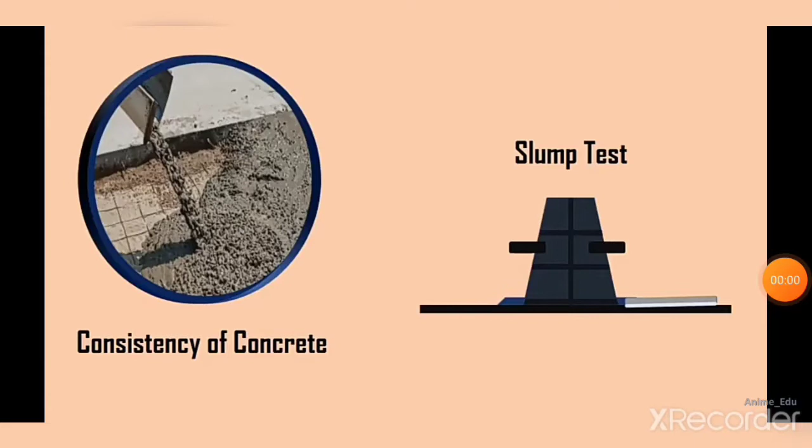...concrete work where the nominal maximum size of the aggregate does not exceed 38 millimeters. This method can be employed either in the laboratory or at the site.

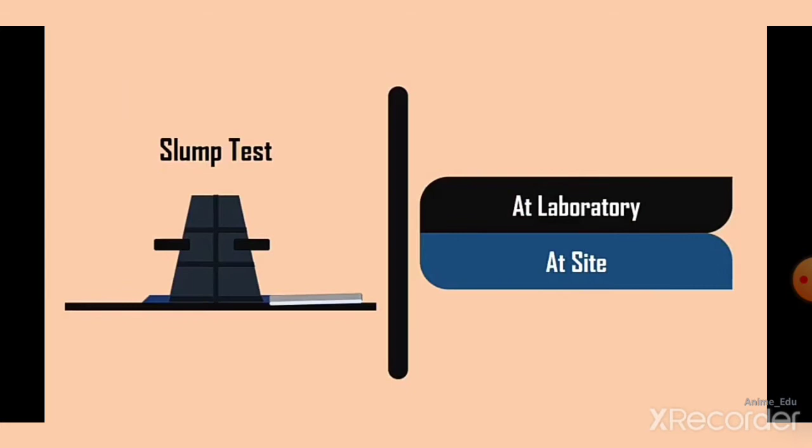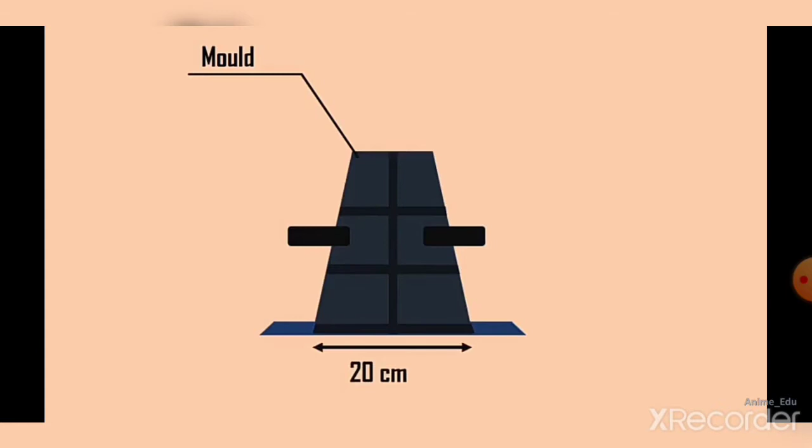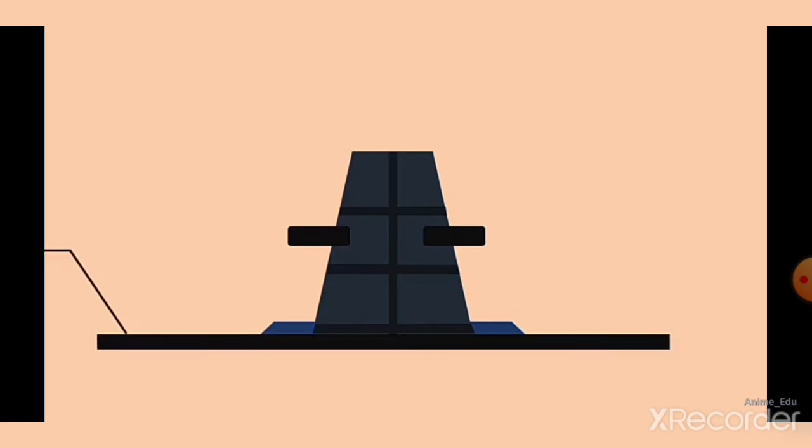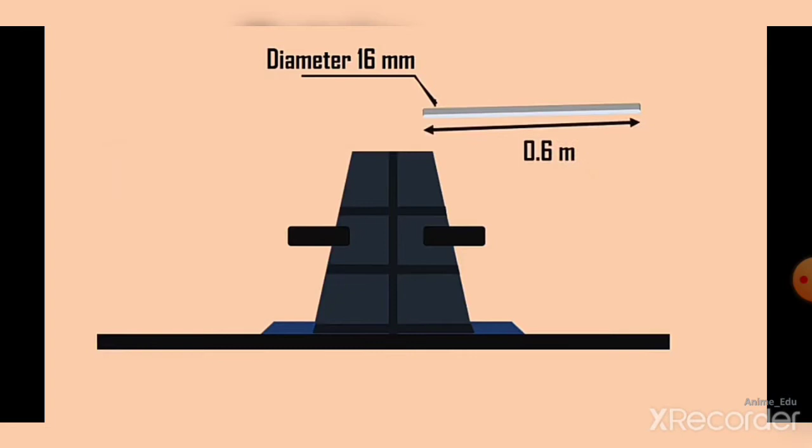Apparatus required for slump test. The mold for the test specimen is in the form of the frustum of a cone having the bottom diameter of 20 centimeters, top diameter 10 centimeters, and height of the cone is 30 centimeters. A metal plate of thickness 1.6 millimeters is used as a base. A tamping rod of 16 millimeters diameter and 0.6 meters long is used.

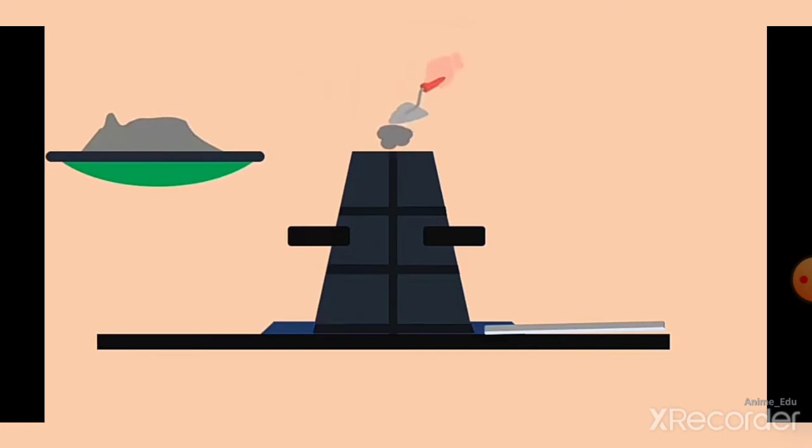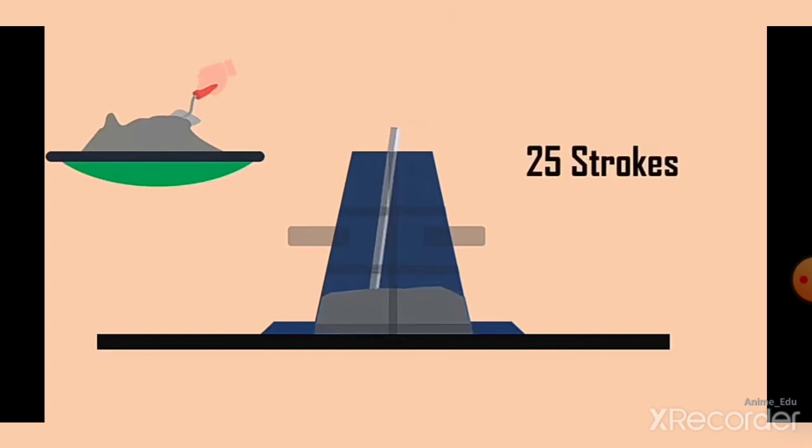Let us now see the step-by-step procedure for concrete slump test. The internal surface of the mold should be thoroughly cleaned and freed from moisture and any set concrete before commencing the test. The mold is placed on the smooth metal plate. The mold is filled in 4 layers, each approximately 1/4 of the height of the mold. Each layer should be tamped with 25 strokes with tamping rod, such that the strokes are distributed over the cross-section.

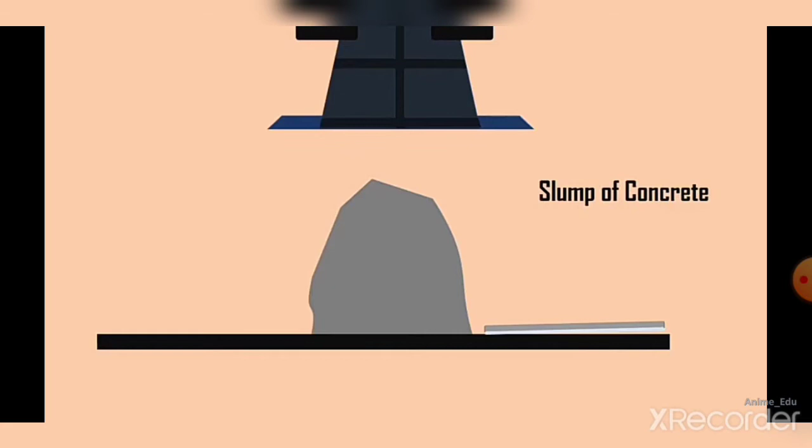After the top layer is filled, the concrete is struck off level. The mold should be removed from the concrete by slowly raising in a vertical direction. Now, you will notice concrete tends to subside. This subsidence is referred as slump of concrete. This slump value is then measured by the difference of the height of the mold and that of the highest point of the specimen. This difference in height is taken as slump of concrete. The pattern of a slump is displayed on the screen.

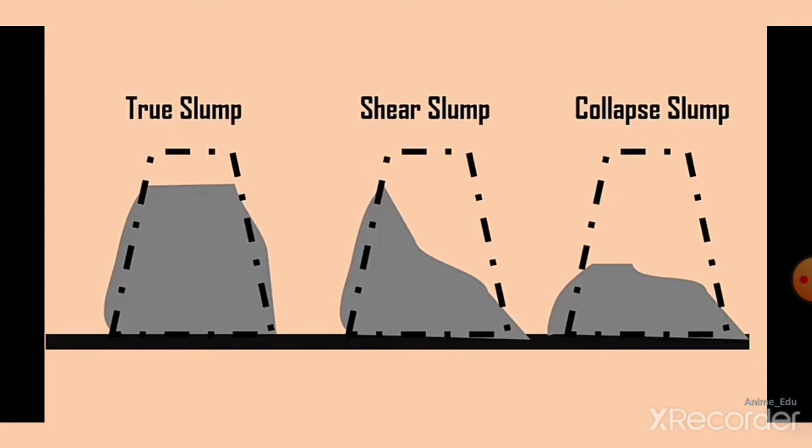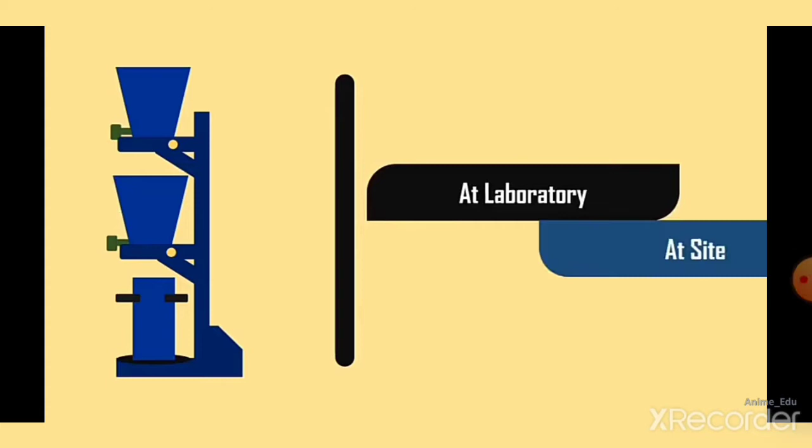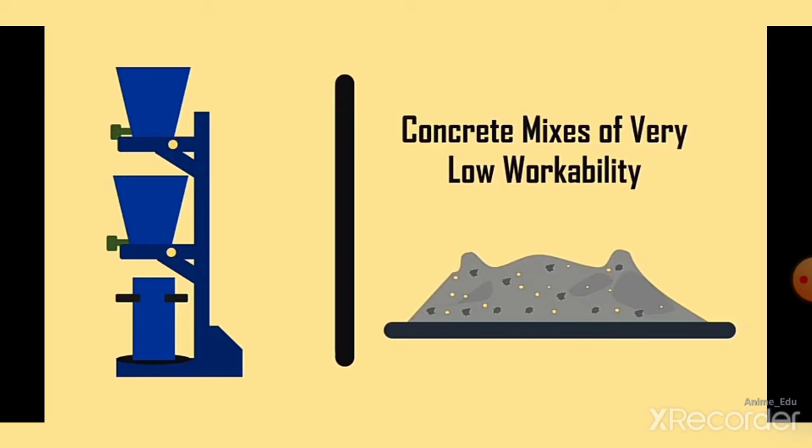The test is designed generally for use in the laboratory, sometimes used in sites. This test has an advantage of using this method for concrete mixes of very low workability. The compaction factor apparatus consists of the upper hopper of dimensions, top internal diameter 25.4 centimeters, bottom internal diameter 12.7 centimeters and internal height 27.9 centimeters.

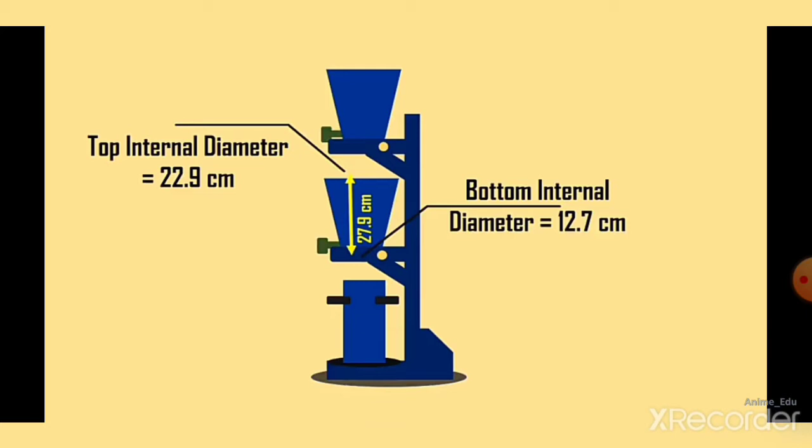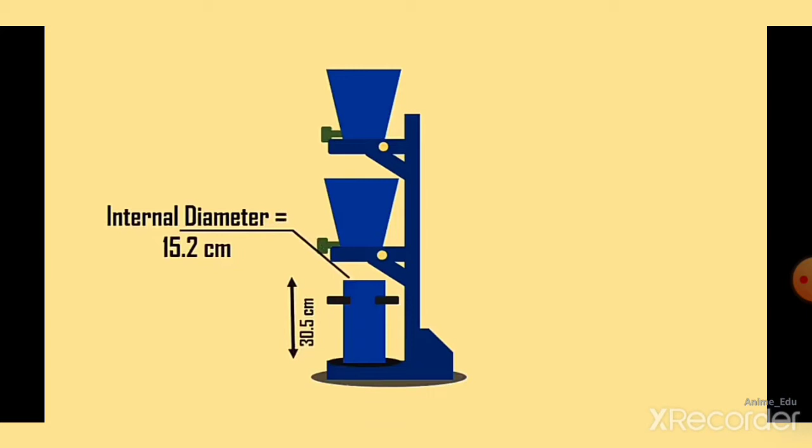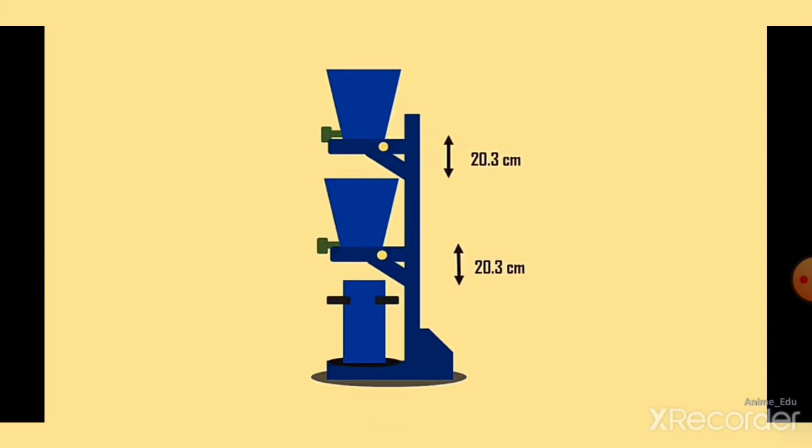A fixed lower hopper of dimensions, top internal diameter 22.9 centimeters, bottom internal diameter 12.7 centimeters and internal height 22.9 centimeters. And a cylinder C of internal diameter 15.2 centimeters and internal height 30.5 centimeters. The distance between upper and lower hoppers and lower hopper and cylinder is 20.3 centimeters.

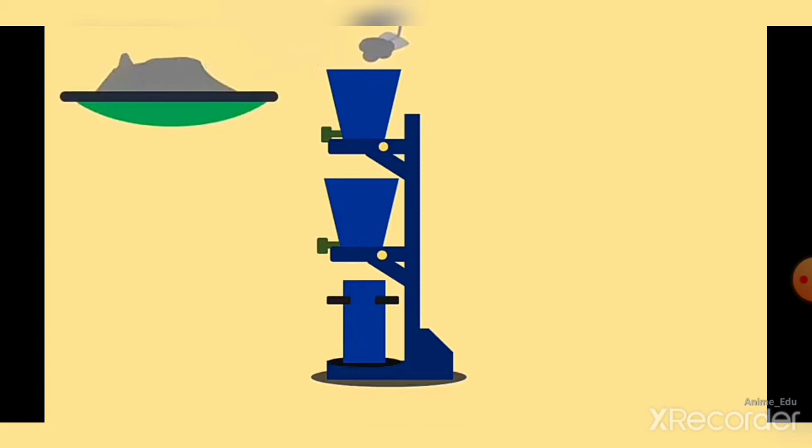Procedure. The sample of concrete to be tested is placed in the upper hopper up to the brim. The trap door is opened so that the concrete falls into the lower hopper. Then, the trapdoor of the lower hopper is opened and the concrete is allowed to fall into the cylinder. The excess concrete in the cylinder is leveled. The outside of the cylinder is wiped clean. Now, the cylinder filled with concrete is weighed. This weight is known as the weight of partially compacted concrete.

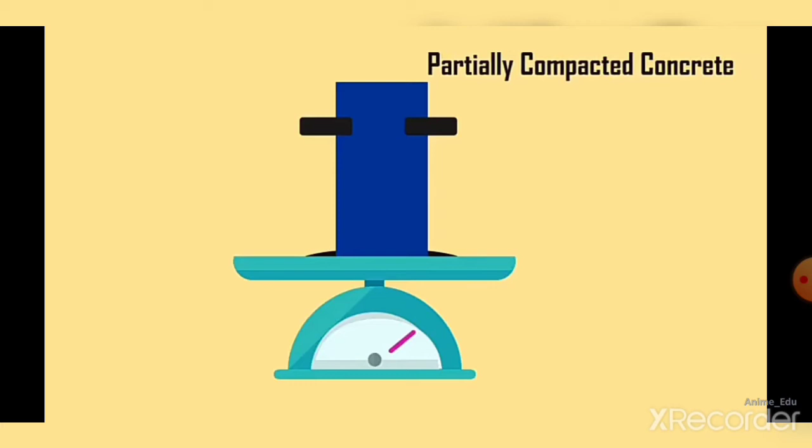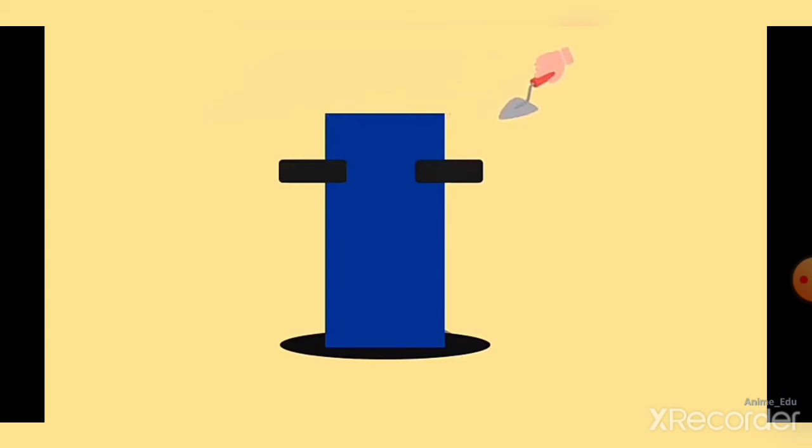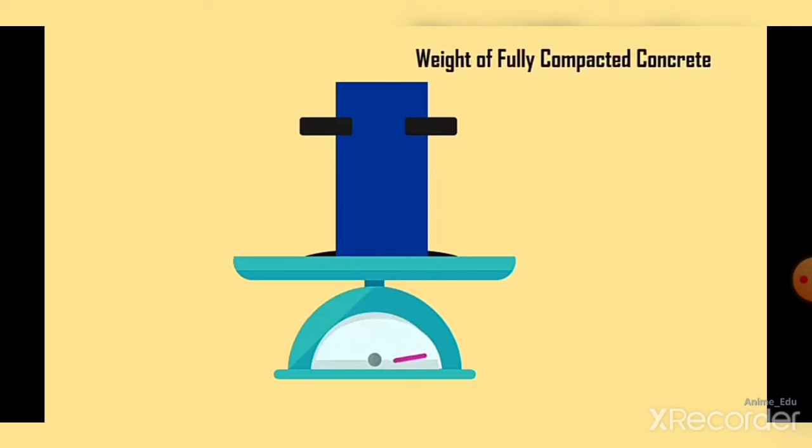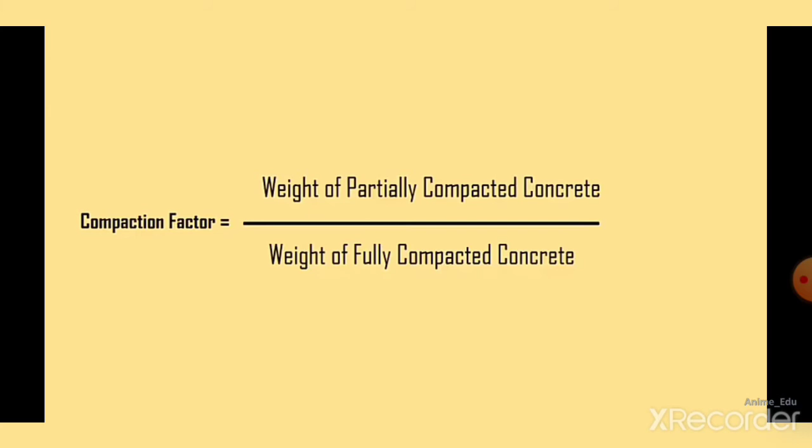Then, empty and clean the entire cylinder. Now, fill the cylinder with concrete in layers, each approximately 5 centimeters deep. Once fully filled, the top surface is leveled off. The outside of cylinder is wiped. Now, weigh the cylinder. This weight is known as the weight of fully compacted concrete. The compaction factor is equal to the ratio of the weight of partially compacted concrete with the weight of fully compacted concrete. With the help of compaction factor value, the degree of workability is calculated with the help of the table.

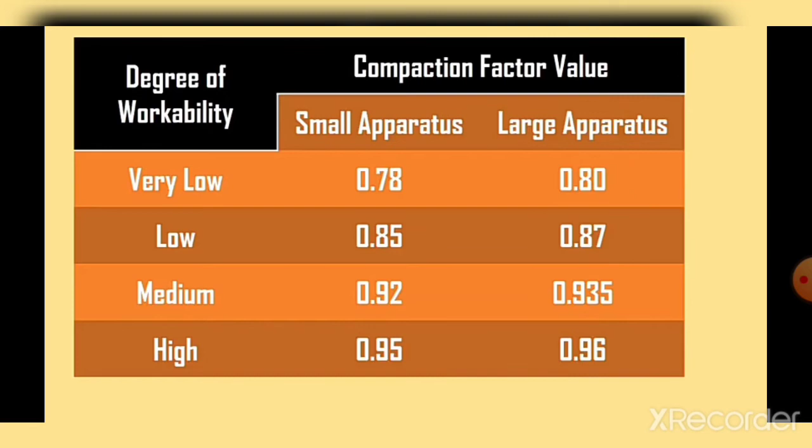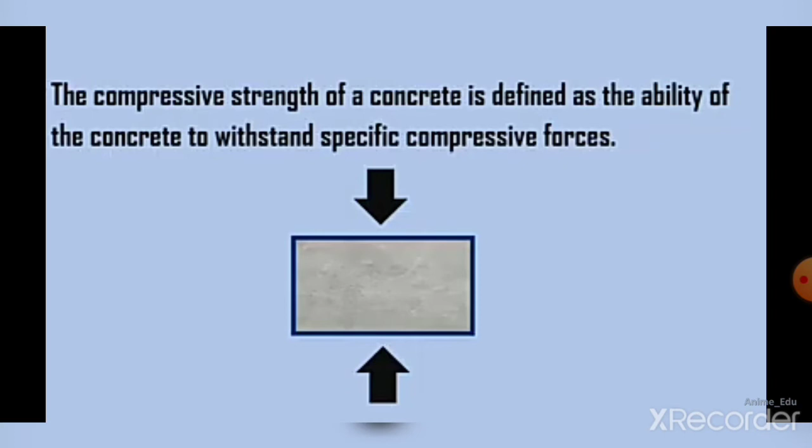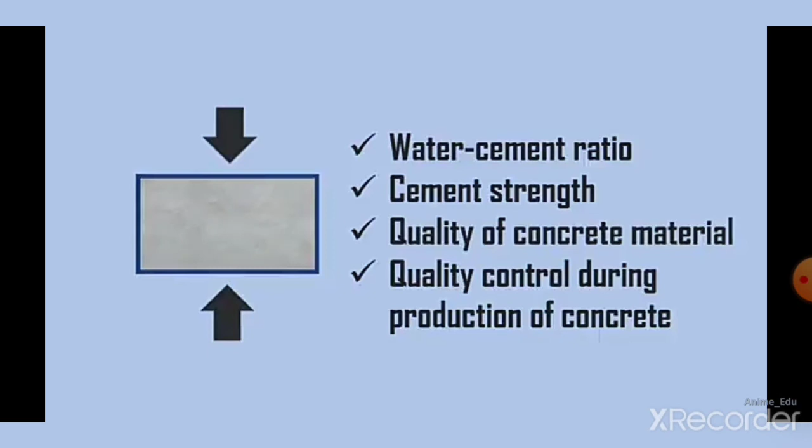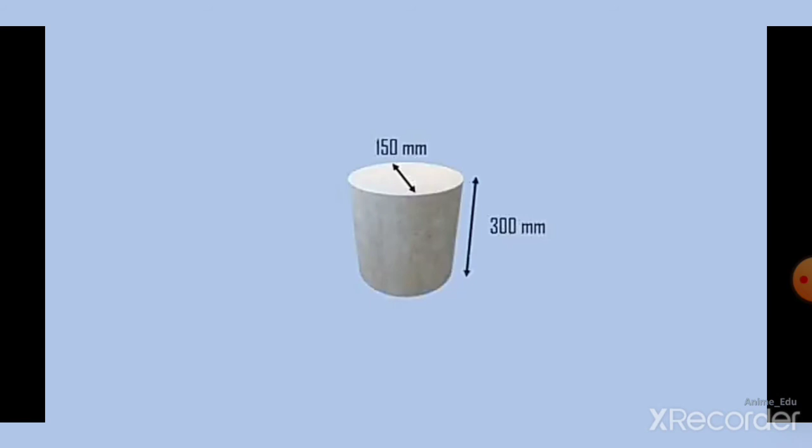Strength of a concrete is defined as the ability of the concrete to withstand specific compressive forces. Compressive strength of concrete depends on many factors such as water-cement ratio, cement strength, quality of concrete material, quality control during production of concrete, etc. Generally, the specimens shaped in cube and cylinder are used for testing the compressive strength of concrete. The standard size of a cubical specimen is 150 mm by 150 mm by 150 mm, while the cylindrical specimen is 150 mm in diameter and 300 mm in length.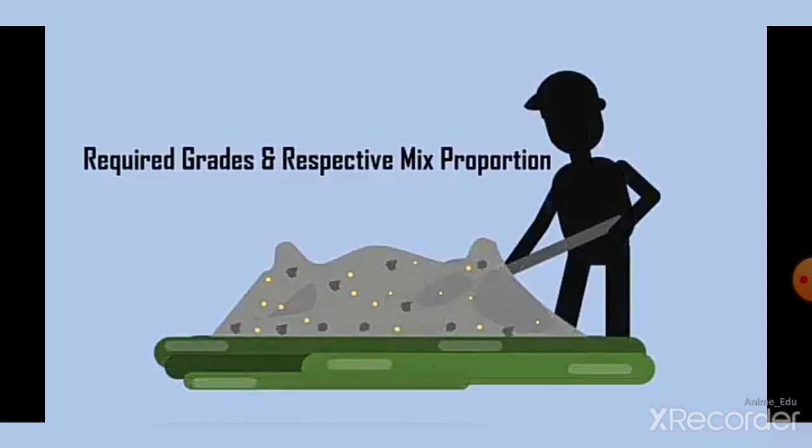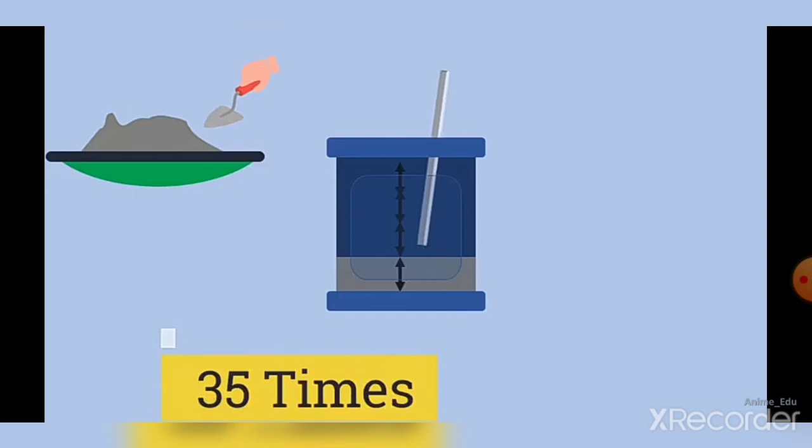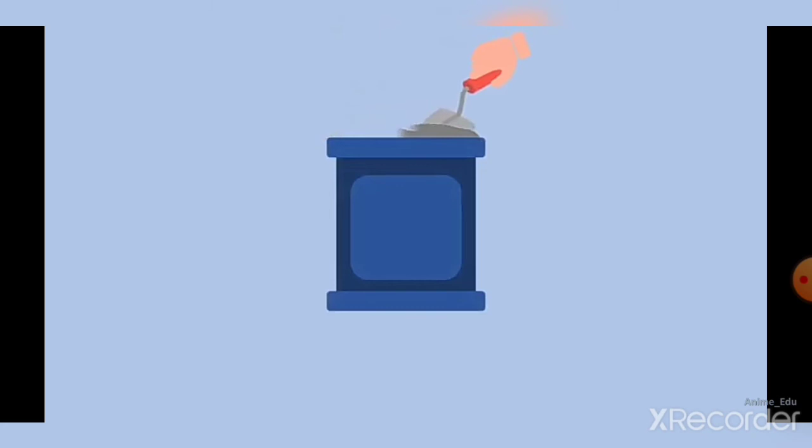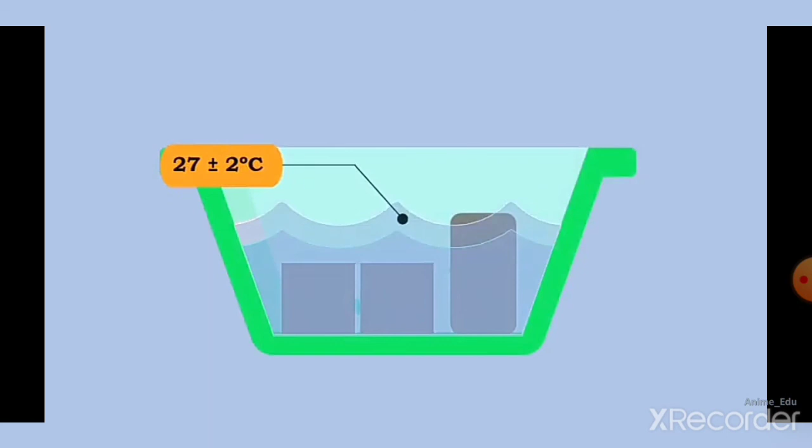Generally, the fresh concrete is prepared according to the required grades and the respective mix proportion. Once the fresh concrete is prepared, the inner surface of the mold is greased to avoid sticking of concrete. The prepared fresh concrete is then filled in mold in 3 layers. After filling each layer, tamping should be done for 35 times for cube and 25 times for cylinder using a standard tamping rod. Once the mold is filled, level off the top surface with a trowel. After a day, the mold is removed and the specimens are dropped into the curing tank at a standard temperature of 27 plus or minus 2 degrees Celsius.

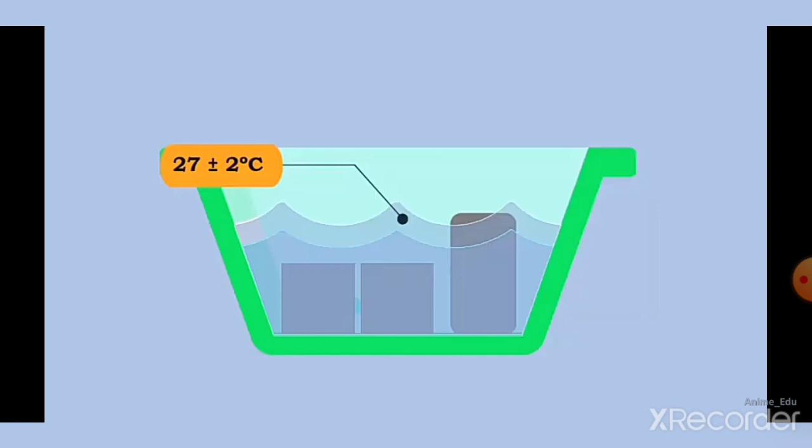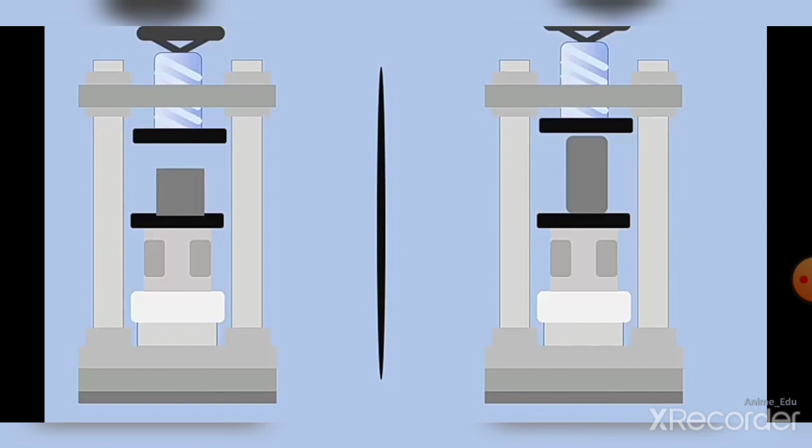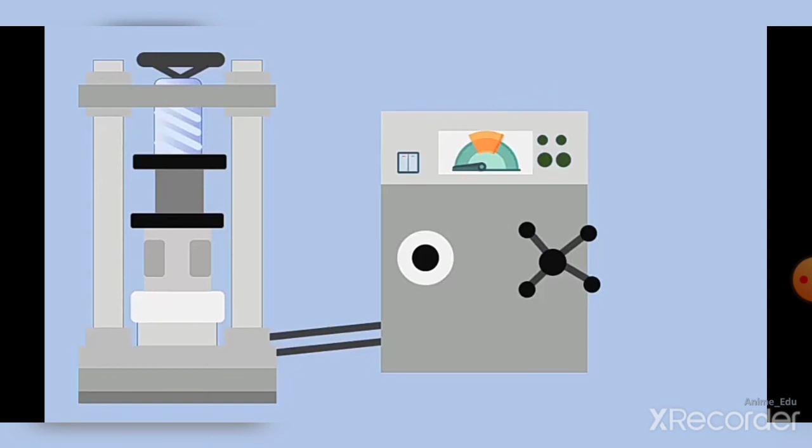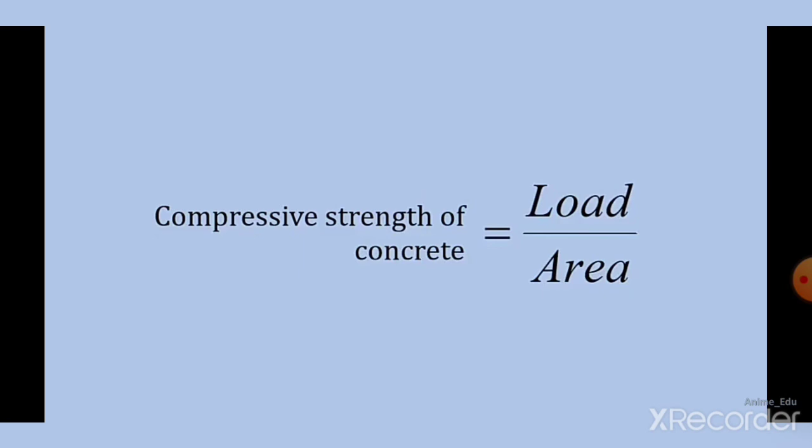After 7 days, the specimen is taken out of curing tank and dried for a while. Then, the specimen is placed on the compression testing machine. The cube specimen is just placed on the bearing plate, while for cylindrical specimen, it is placed vertically. The instrument is adjusted such that the plate touches the top surface of the specimen. The load is applied gradually over the specimen at the rate of 140 kg per centimeter square per minute. The load at which the specimen fails is noted. Thus, the characteristic compressive strength is calculated from the ratio of load and the area. The test is generally done with the help of 3 specimens and tested for 7 days, 14 days and 28 days. Thank you for watching.